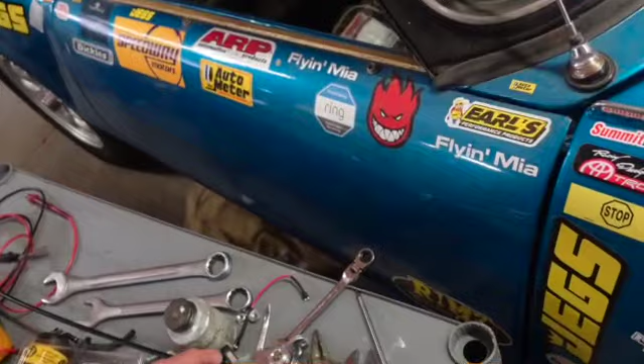Okay, well, let's start on this thing. I'm gonna have to make a piece of wood over there to mount this pedal, and we're gonna finish this up in a day or two, and we're gonna have a fun little test run, because we got this new fuel pump. I'm gonna kind of sort this out a little better, this fuel line action here, kind of get that done a little better.

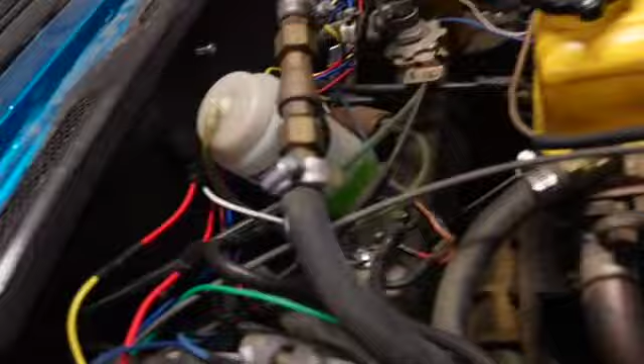We're also going to eliminate this system here. We're going to go from here to here. We're going to eliminate all this preheater stuff. I don't think that's doing me any good other than just getting in the way. So we're going to knock that out.

So I got a drain. There's my little drain pan right there. And we're going to drain some fluid out of it, coolant fluid, and we will delete that mess. I don't know, I thought it'd work.

Don't drive it when it's that cold anyway, and you're right next to the exhaust manifold. And I was thinking the other day, see these little brackets, that little bracket right there? I was pretty handy to have. How many of you know what those do, or did, or do if you got the parts? See, there's one over here too. Handy to tie stuff to sometime.

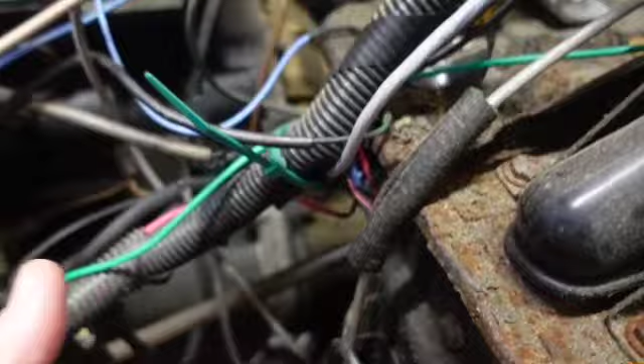That held those little cardboard shields that went here. These do pretty good, but they had these little cardboard pieces that went here and kept water from splashing up on the engine. So that's all. I don't see any point in those.

And the other thing I was thinking about the other day too was, when I got this car, it was like 99% original, if not 100%. And it had a radiator half that size, and it had the little blanking plates on the side. And this just keeps the air moving through the radiator.

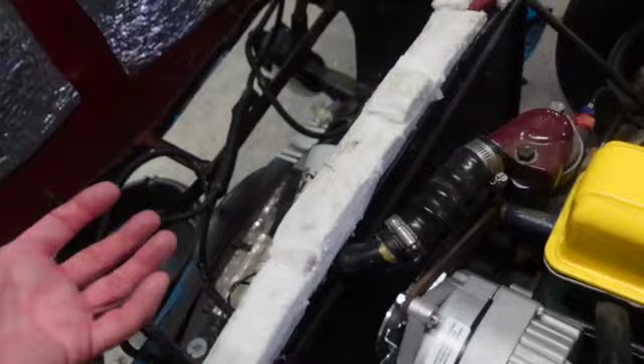And then I got a nice SPAL fan there, and it's just on a switch under in there somewhere. I don't know, I put it down there low. Isn't that cool? See that little red thing right there? I put it right down there low. But I'm gonna have to do some woodworking to get that pedal assembly in there to bring it up.

But we'll do that another day. I gotta start on the grass right now. It's almost 6, so I'm gonna go get the tractor out. I gotta switch that thing around, and yeah, I'll put both my Allen keys right here.

Cool. Okay, so this is the preliminaries. I'm not gonna take this out.

Let's turn the heat off. I'm kind of for that, it being 100 degrees, and that's why you turn the heat off. And I had a 76 MG midget, and you had to go under the bonnet and turn it out. Wasn't that nice? But if you didn't read the book, you didn't get heat. Right, Kathy? And you got to know to do that. You got to know the knobs to turn. You got to open the little ductwork things on MG midgets of that era. And if you didn't do that, you went around cold. And you'll end up having to put a grizzly bear around your face or something. Try to keep yourself warm.

Every time I want to get on the tractor, it starts raining. I don't care, we're going in. I'm going to get it started anyway. Make a couple of runs. I got about 45 minutes. Wasn't supposed to rain today. All right, well, get moving.

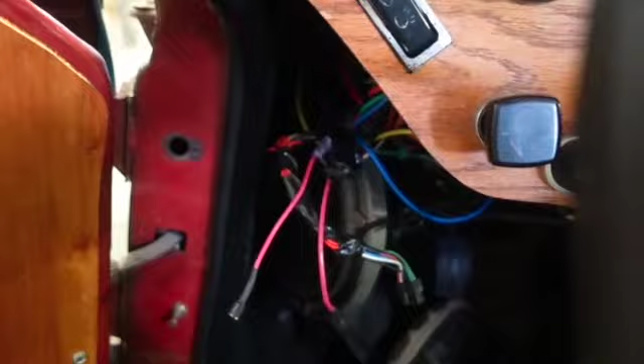All right, one of these is hot on ignition, so I got to figure out which one and kind of deadhead it and mark it, so I might want to use it for something else later. And the other one goes to this, so I've got to deadhead that stuff and get it up in there. But don't that look neater? And I might get a little black spray paint or something, spray that or do something, I don't know. But there it all is.

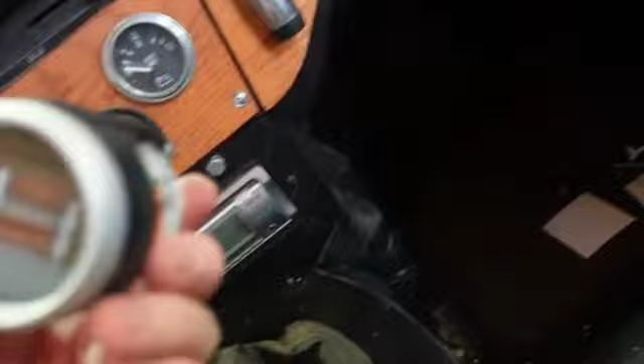Like I said, it just showed the three dashes and quit working. Makes you so mad, it's so expensive. And then there was my little thing that I made that I pulled off right there. So we're going to just kind of neaten it up in here. That was a useful thing, but once you get your carburetor set up, it's kind of just a little bit of a novelty, I suppose. I can understand keeping it going, but you can look at your spark plugs if you want to know what's going on.

Oh boy, that was some grass cutting fun there. Threw the belt last night, but I was able to fix it today, and my gosh, I think they could roll that up for round bales out there. Oh God, that was thick.

Well, I'm about to use a movie line that I never thought I was ever going to use. I didn't want to or think about it, but you'll see it in a minute. All right, come on. I usually use that little metaphor there to close out videos, but not this time. I spent some time out here today on, let's see if I can find my other light. Ooh, my bigger light. So, you won't believe what I'm about to say. I'm trying to build it up a little bit here. I gotta get a light to find the light. Okay, found the light. Stick with me here, this is going to be good. Don't go anywhere. Gotta get myself in some kind of apple pie order here. Let's use the big light that I don't like to use.

Okay, so here we are on Spitfire, like it describes, and you see there are three screws there. One, two, three, and that's the best I could do. This was hard by myself, because, well, just because I had to put a piece of wood behind a piece of metal by myself.

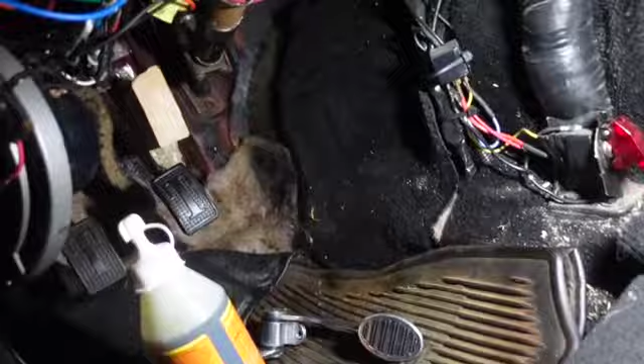So we'll show you what I did here. I had to put a 5.5 inch block of wood right here to be able to mount this pedal. I can't hear that noise. So I'm going to put it like this. It's going to be a little bit at an angle, and I got my cable figured out. So I had to glue.

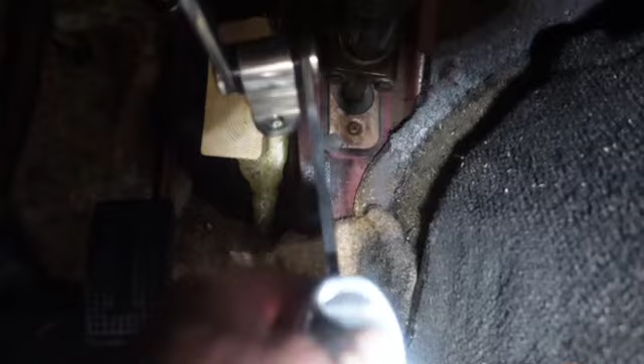Now you're using the accelerator pedal. Ready for the big line here? Okay, and this is Gorilla Glue, strong stuff. So, from the Blues Brothers, you know, when he's gluing up the accelerator pedal for Bob's Country Bunker boys or whatever it is, the good old boys.

And so there's where we're going to be. And tomorrow, see, I had to bring it way out there because the pivot for the original accelerator was so far up. So that's gonna be just perfect. And so what I did was I tried to line this up with the brake pedal, you know, kind of lose all that.

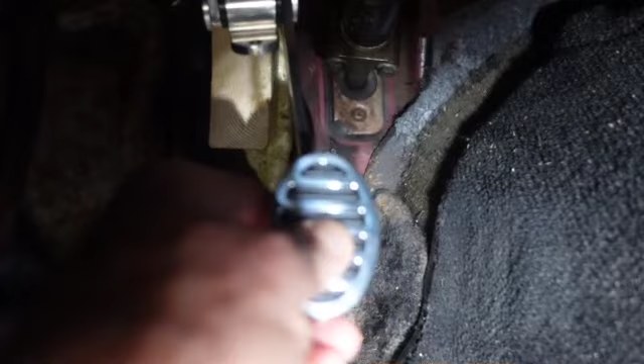A millisecond matters. I've always wondered about old British cars when they shipped into America. Americans were bigger and British people 100 years ago were smaller. That pedal arrangement on old British cars is mighty close. I always wonder if that killed my friend Jimmy. But it was more than that, it was other things, but that doesn't matter anymore.

So I think that's going to be fine. And now the trick here is going to be to put some Loctite in these. And I'll tell you the truth, one of these is already stripped out on where the hex key goes in it. It's cheap junk, but anyway, it'll be okay. So I'm going to put, I don't think it needs any lubricant, but I'm going to put some Loctite in there. But anyway, I thought that was pretty good.

Now, how many men other than Dan Aykroyd are ever going to be able to say that line when they're dealing with accelerator pedals?

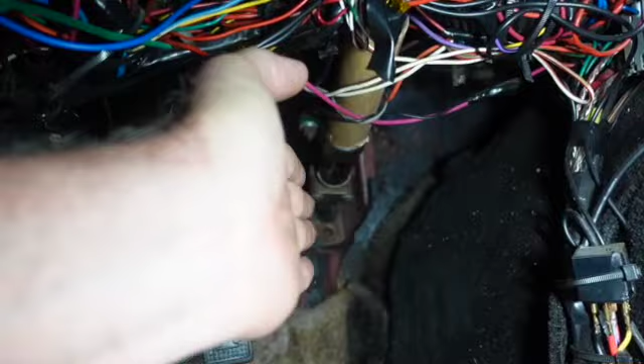Okay, I think we're in trouble here. So I'm going to have to do a little fancy cutting to get the carpet and everything around there. That's fine, that thing is in there ultra tight. And it's taking, you know, action this way, it's not taking it side to side. But I was surprised at 5.5 inches to bring it up to snuff. But that's, you know, everybody's going to, I don't know, unless you got one of these and you're doing this, you're not going to be doing that.

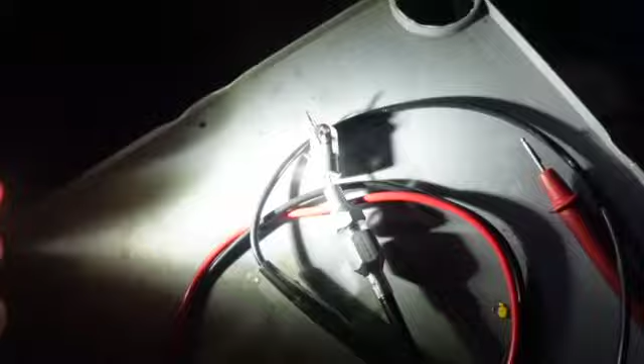But you probably might have to make a block of some kind. So this is the one that goes down to the pedal. I gotta kind of measure, make sure there's enough room for all of this mess. I think there is, and enough room for all of that.

Oh, this is the one that flutters if you don't turn it up all the way. Oh, okay. And oh, cricket. Sounds like my phone ringing.

So I think I got enough throw there, but I kind of want to get that bar up as far as possible so my foot won't interfere, because I got big feet. You know what they say when guys got big feet, right? Okay, so I've got to get this bar up as far as possible. There you go, get the light on it correctly. So I might move it up a notch or so. I don't know yet, that might be enough. But I don't want my foot hitting right here, you know? So we'll see how that goes.

So I gotta go in. Can you believe it? It's almost 8:20. All right, you can hear all the katydids out there.

All right, let's start to, it doesn't matter to you, but it'll be day after tomorrow before I can get to that. All right, I'm gonna try to keep this all in one piece, and I hope to do a test drive on this. I gotta get the Jag going, but we're gonna do a test drive on this so I can kind of give you an idea what it's like.

There are those three positions, and I'm going to use the middle one. Always start with the middle one, and then I got to shore up all of this gas line stuff.

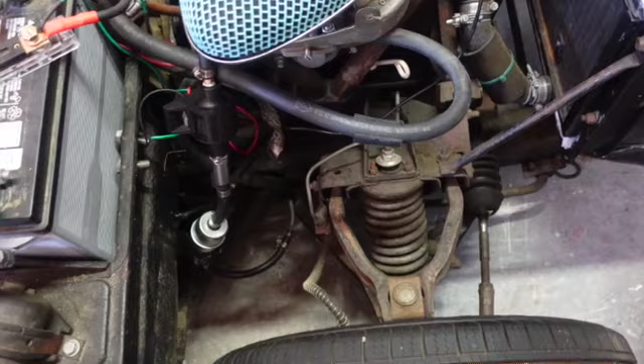All right, so let's mount up this pedal, and we're gonna put our cable in, and I'm gonna measure. Let's see, that's the part that goes to the carburetor. Okay, I hope I don't have to cut any of this off.

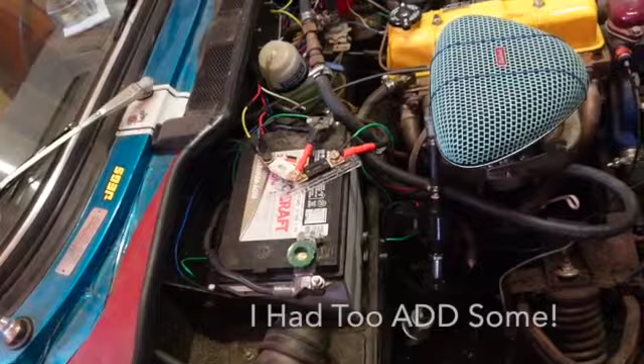I'm going to real quick shorten up, because I said I would, these hose things here. I don't know. Maybe I ought to do the cable. I'm going to put the gas, let's finish gas pedal, and then we'll do that. Just measure this hole and drill it.

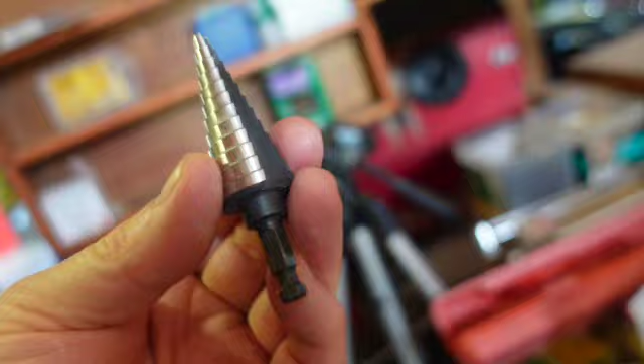So we want that to be as close to that as possible. 5/16. Oh, okay, cool. Well, let's see what we got here. It's an unmarked bit there. I think I'd rather go get a straight bit and do this. I think that'd be better.

Okay, here are my weapons of choice. I've got these two little screws that I don't really care for, but I'm going to use them. And I'm going to drill a pilot hole, and there's my bit that fits those. And there's my Bosch tool.

So let's go in here and mount this pedal up. Now the way I do it is I will kind of mark a hole, and I will mark one of the two holes, and then I'll screw it in and kind of get it firm, and then I screw the other hole. I try not to, I do one and I do the other one after the piece is mounted. Generally you just end up lining up a little better. Okay, so there's my first mark, and like I said earlier, I think it's going to be a little crooked, so that's okay.

I just don't want to split that piece of wood. So let me change bits, and we'll get her started. It's been so long, I almost forgot to put my Loctite in there. Let me go do that, because I just about did forget it.

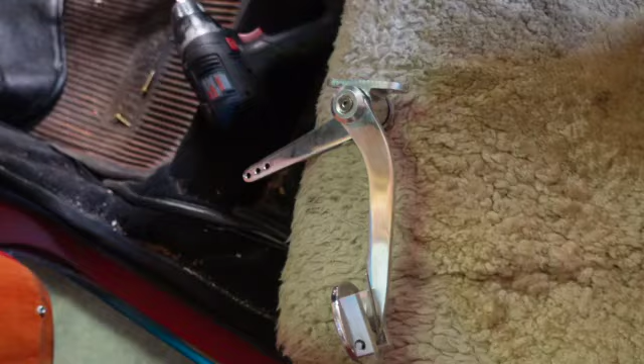I was raising the screw up to it and realized it. Let me double check and make sure that I want this where it is. So she's gonna go kind of like that.

I think I'm gonna take that up a notch. I'm gonna go get it and adjust this thing. I think I want that to be a little higher up, the arm or the pedal down, however you want to look at it.

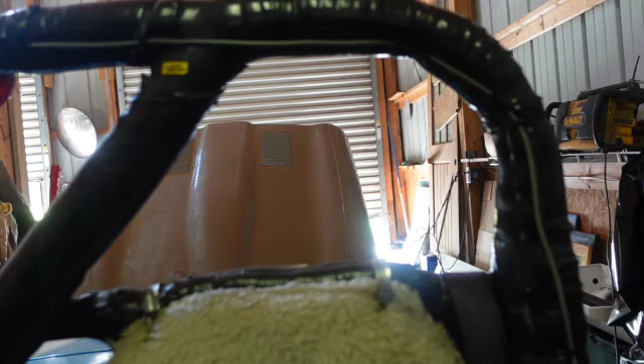You know, it's funny, I found, I need some hair stuff. Ooh, hang on everybody. I found that one of my wrenches fits better than these wrenches that came with them.

That's the way it goes sometimes. I think the tool stripped out more than the screw, because I don't know why they would do that. Why would you do that?

Okay, just to kind of prove the theory here, just put a little drop in there, a little dab will do ya. And put the cap back on that.

I did end up adjusting the arm up a little bit more. And so there we go. Just to make sure we all feel happy here. Okay.

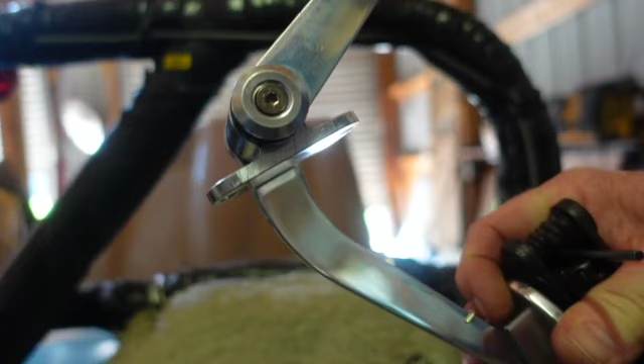Okay, and that's all you need to do. You can tell I brought it up a couple of notches. So, alright, that's cool. Just put all your tools where you can get to them, I guess. We'll be drilling the hole for the cable here in just a minute.

Okay, I decided to go with this instead of a drill. And you can see there, it's a little crooked, but you know, who'd notice? And so I think that's going to be fine once I get the cable adjusted.

And you know, there's no laws or rules. I mean, whatever works and keeps your gas pedal away from your brake pedal there. I think that's good right there. So let's mount up our drill here.

You might as well just stick with me. It'll take a second. So see what I mean? All I got to do is drill that pilot hole.

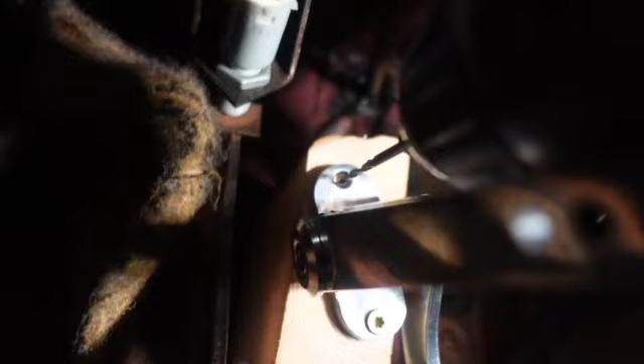Keep clearing your flutes, you know. All right. And then you just, I had a feeling.

That's not a magnetic bit thing holding that in there. I'm screwing up all my focusing, but okay.

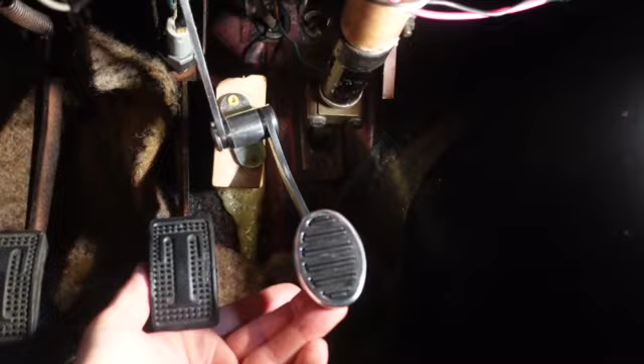And I think that's just all in the world you need. And then you got your pedal. All right. And then I'm not worried about that being a little eccentric up there because that cable's pretty loose.

All right, let's get our tools out of here and sort of figure where, ouch, where we're gonna go. Okay. So there.

Okay, so there's that screw right there. Let's work off of that. All right.

That spring's on there kind of weird, but that's okay, it's working. Looks like it's hooked in more than enough. I don't think that's going to interfere with my brake light switch. So let's go up and see.

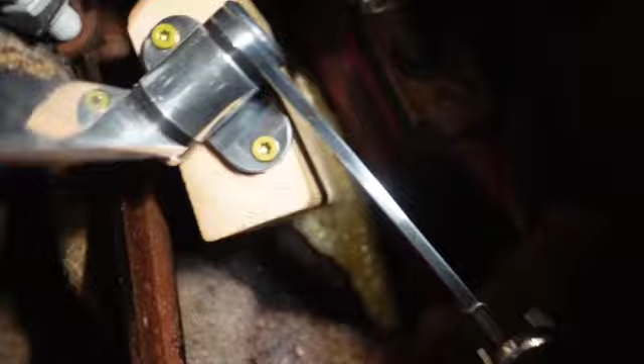Okay, there's the hole for the wires. There's that screw there. I can't see putting it anywhere else. Okay, so there's that screw there that was underneath.

I'm just gonna go in right here and see what I can do, okay? Woo, boy, it's hot. Okay, I've got to use my other hand to hold those wires back. Last thing you want to do at this point is nick up a wire.

Those are the greatest bits ever. Came from James and Barbara in, where were they? Burlington, yeah. And that's the one that gave me that old truck I painted turquoise. But he worked in a machine shop and gave me these bits.

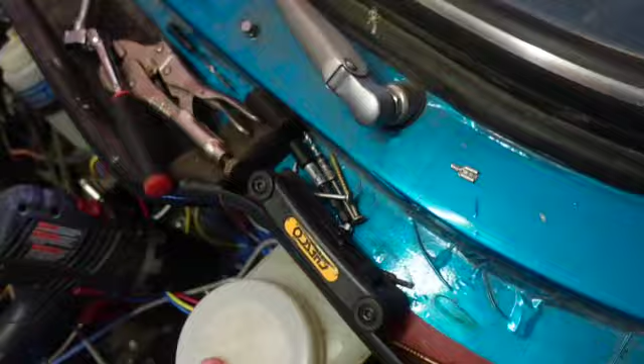I've broken most of them because they're so brittle, but there was some kind of drill bit. Right now, all right, we just popped through, and that's a step bit. So let's see where we are here.

All right, let's see where we are. We're way over there. All right, well that's okay. See the tip of the drill right there? I'm gonna go with that. I ain't got no other way to go. I keep all my stuff in one place. Let's see if I can get this through there and get enough on there to give us a running start.

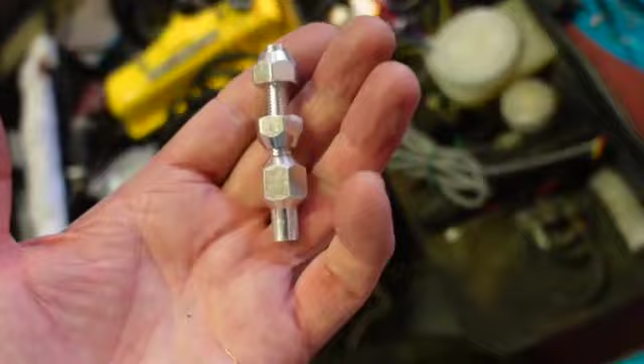Okay, let me go get the measurements on these. All right, I got her in the vise, and let's see what I can do here. Got the vise and the vise grips. You know, good things are going to happen then, don't you? Oh, well that turns like butter. Maybe it's supposed to, I don't know. Well, that was nothing, I didn't think it would be much. So there you go, so she's got a little twist to her now.

Well, that was hardly even worth taping. Dadgummit. Okay, so that's better. It ain't perfect, but it's better. I'll show you what I got here. I'm tightening up the cable hold. I think it's 14 millimeter or 9/16 or something.

And you don't have to go crazy here. Okay, I don't know if I'm going to do a test drive today. I might crank her up, but I'm not going to be able to take the Jaguar out. I just ran out of time. I tried to accommodate a bunch of time for this. Take the battery charger off the Jaguar, so I won't forget about it.

Now I don't think I told you, but I went over and soldered that end and cut it. So you can use super glue, but don't breathe burned super glue fumes, whatever you do. All right, I'm trying to. I know this is shaky, but this is like under the car stuff. So let's get that.

Come on. All right. Just feed it on up in there as far as we can. And I gotta tell you, I'm actually laying on the end of it. All right, come on, keep going. All right, come on, come on.

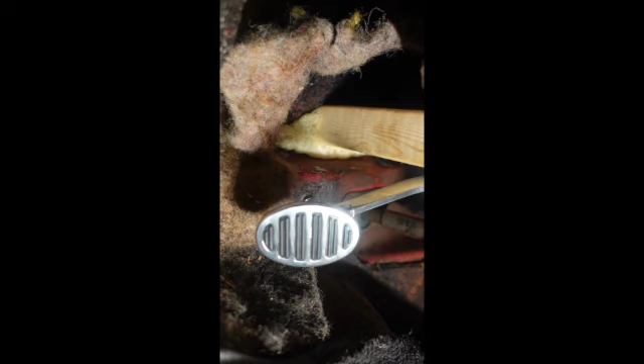It's a long cable, it's like it's 3 feet long or something. Okay, and it's stuck to the magnet on the flashlight. You know, everything's gonna go wrong when it can. So I'll tell you the truth. All right, we've got it all up in there, and we're down to this.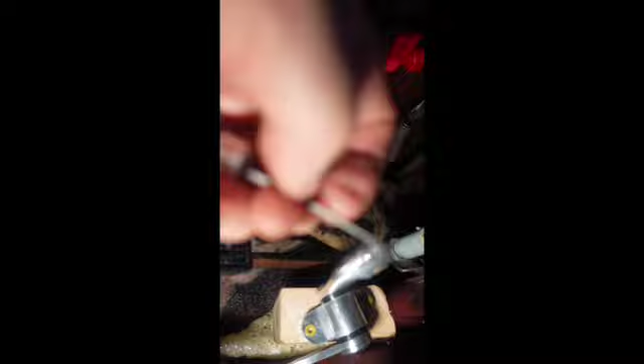So let's go ahead and put this on. I think I'm gonna put it on. I'm gonna have to lock this too somehow. All right, we'll worry about that in a minute. I don't think I can squeeze them with my fingers. It's got the old end on it there.

Nope, can't. All right, well, we're gonna attach this, and I'm gonna attach it to the, I think the, I kind of want to be as close to that thing as possible, so I'm gonna go to the back one. All right, it'll be all right. This ain't no turbocharged powerhouse anyway, so a little bit extra throttle ain't gonna hurt nobody. Okay, I'm not gonna pull that.

Let's just take a look at that. I'm not gonna pull that. I think that'll be fine. Okay, so I gotta find a way to block this up or do something with it. I think I got an idea. Okay, so my idea was to get a little bungee cord, and that'll do that. Okay, leave that tool right there to remind me to pull the pin. There's what she looks like.

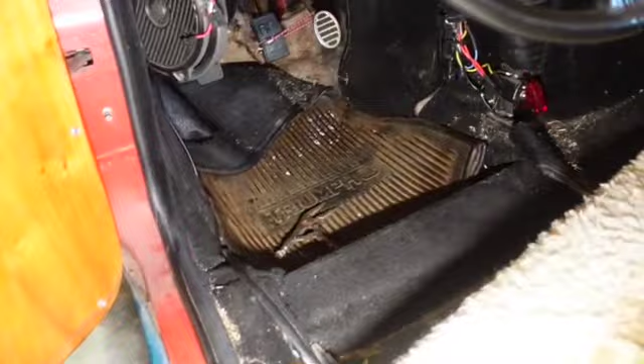All right, and should I wait till tomorrow and go for a ride? I don't think I'm gonna. Got hair all in my mouth. All right, so let's pull on this. Keep the salt off your hands there. Okay, don't let that touch across the battery. Okay.

And you got to figure out your route here. I think through there is okay. That doesn't bother me. All right, so let me slip the cables on and get over there and see what we got adjustment-wise. Okay, and we got to slip our outer cable on. Might as well just hang on. Alright, I soldered in. Okay, I lost one little strand, one little pitty there.

So you don't pull it back through again. Okay.

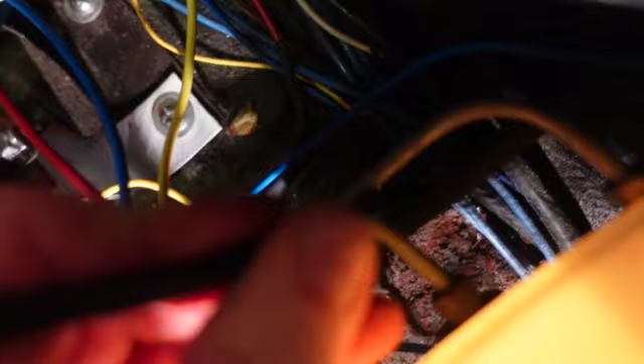So there's my outer cable. What you want to do here is make sure that it seats all the way down, right there, that black cable going into that little silver thing. You want to make sure it's not lipped or anything. That's okay with me, I don't think that's going to cause any problem.

Boy, it did need to be 3 feet long though, didn't it?

Okay, so I think that pillow's about had it. What do you reckon? Oh, if that pillow could talk, it would tell you about Doris Day and Rock Hudson, pillow talk.

Okay, so here we are now, and you want to keep pressure on that, and you know what? That still ain't long enough.

Even if I pulled it through the other way, I would have never dreamed that. Well, looks like you fouled up, huh? Well, I know what I'm going to do.

I've got plenty of cable to get there. I just need more outer cable. Well, we can... I think we can... I've got outer cable.

Dadgummit, if anything can go wrong, it will. There ain't a way in the world that thing's going to reach. I'm still a foot away. And the one in Daphne's a foot shorter.

Well, let's put all our cable stuff up here. They got that dimpled in there. Got dimples, you got dimples on your jaws.

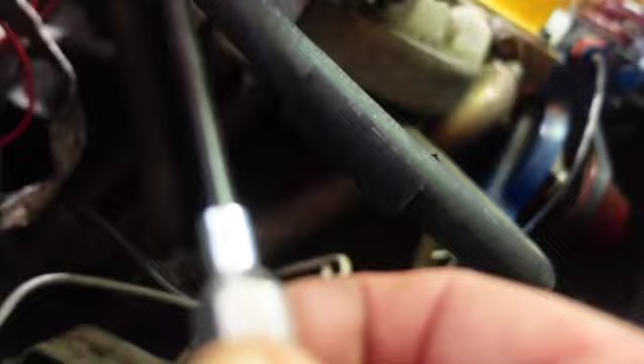Well, let's get a little drill bit and see if I can get this to release.

Ladies and gentlemen, I'm just having a blast. Don't make any mistake of thinking I'm not. This is just too much fun. I'm having a lot of fun.

Let's drill out them little dimples and we'll be fine. Okay, well I drilled through the dimples, and so now I got that off. I ain't worried about doing anything about that.

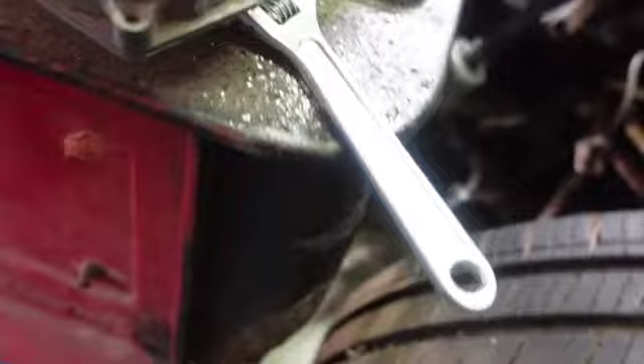Okay, so let me see. I don't want anything on the floor. Let me see how much I need here. I've got a tape measure somewhere. I do. Alright, I'm not scared of any of this. I got shrink tube and stuff so I can make this look good.

So it's down in the hole there, and this is how much more outer cable I need. See, I got tons and tons of the inner cable, so God bless them for that. So let's see how much I need here.

I need, let's call it, let me double check that. You know, it's a little bit forgiving, of course. Let's say about 9 inches ought to do it.

So where's a man going to find 9 inches of outer cable? Well, I'll tell you where we're going to find it. I'm looking at it now.

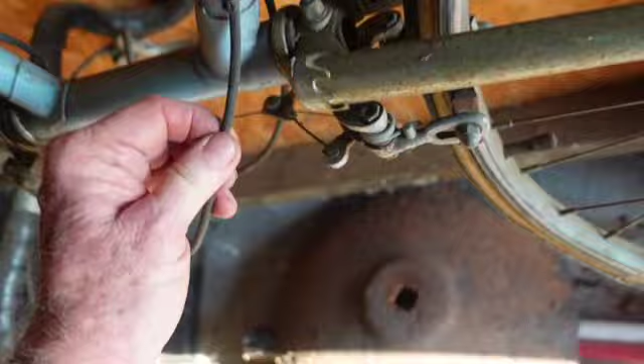We're going to use my old bike cable stuff here, because there's about... those are a little different. Ooh, look at the big katydid. Look at the big bug there.

Yeah, we're gonna use this cable here, and that'll be fine. But telling you the truth, I'm just flat out of time again, and I'm not gonna even bother trying to save this. I'm just gonna cut it off because it looks like it's got a kink and could be replaced anyway. So we're just gonna cut it right off

with these bad boys here. Okay, so see that cable there? Alright, that was kind of bittersweet. Of course, it's gonna be kind of nice thinking that this was off my old bike.

Alright, it's in my back pocket here. Oh, the other tape measure. Well, I got plenty of them.

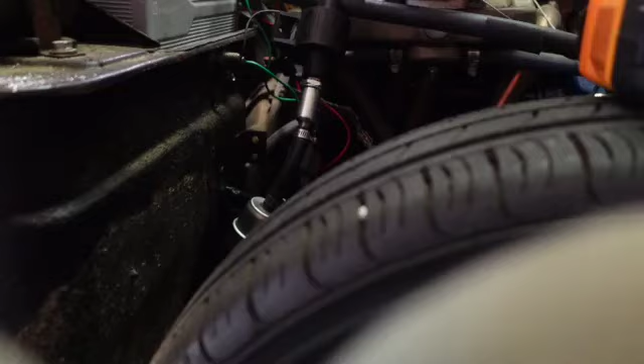So let's get the old inner cable out. I got an idea, let's get the old inner cable out. I'm gonna put an orange thing there. I'll get it later. So there we go.

Alright, so don't let that stand, don't let that fall on the ground, that piece of inner cable, because that's a trip hazard.

So I need 9 inches of this. I keep it there. Okay, so there's my 9 inches of inner cable. Okay, and you don't have to do anything to the other end.

This inner cable went to market.

Hear that alarm? That means I gotta go. Okay.

Alright, let's just take a quick look at this and see. There you go. Before I make all this stuff permanent, I'll put a little stay rod right there and all that stuff. Okay, more later.

Thank you. Alright, I'm coming. Had a lovely little thunderstorm pass, cooled it off like 15 degrees.

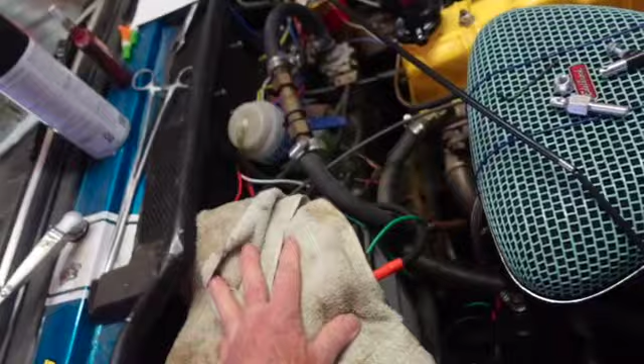Be careful about this battery here. I need to throw a cloth over that just to make sure we don't arc out. Let's put it over the positive side just to make double dog sure we don't arc out across that.

More Gorilla Glue and some zip kicker, and I'm going to zip kick this thing down in that thing, this end down in here, because I don't want that popping up and messing me up later. So let's put a little bit of that on there. I don't know how much I got. I got plenty.

Okay, I've got about 4 pieces of shrink tube on this, and I cut off a little bit of that inner cable that I had, and it's got glue in it, and that ought to take a little tension off the buckle there.

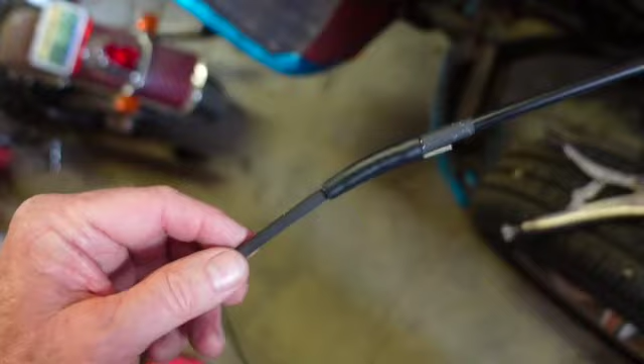I still don't feel happy with this. See how it's bending? Maybe it'll be better when it cools. But I got the super glue down in there and the zip kick, so it won't pull out of there. I think that's going to be okay.

All right, so let's put it there and hook it up to the carburetor. Make sure our gas pedal is up, and it is. Okay, world's greatest wrench right there. No doubt about it. Okay, it's a good song too.

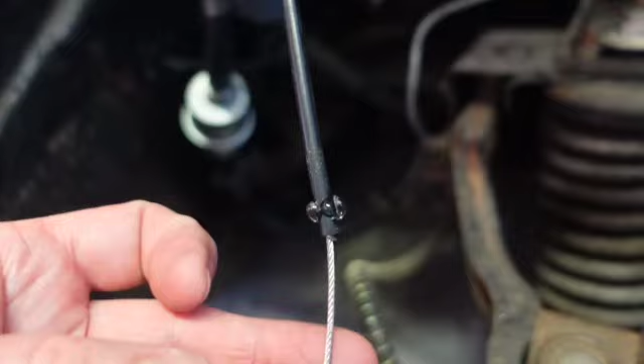Alright, let's get all that stuff pulled apart. I think that's going to be okay on that bend. So you see I got this Gorilla Glue gel going here.

You don't want to get this on your cable at this late date. So there's the gel, here's the end piece, and we're going to let that sort of set.

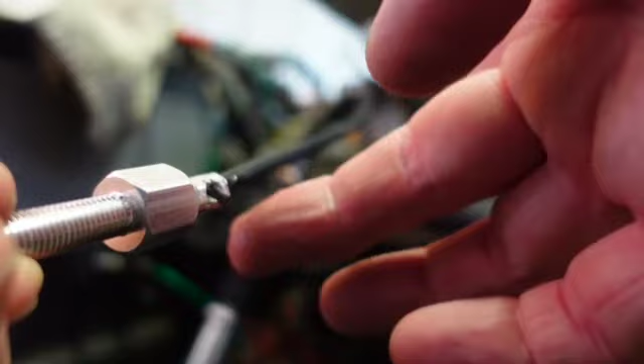Now I don't recommend you do this, but I'm going to do it. I'm going to touch the super glue where I had to drill those dimples out. And how many of you knew that song, Got Dimples on Your Jaws? And then give it a little zip kick.

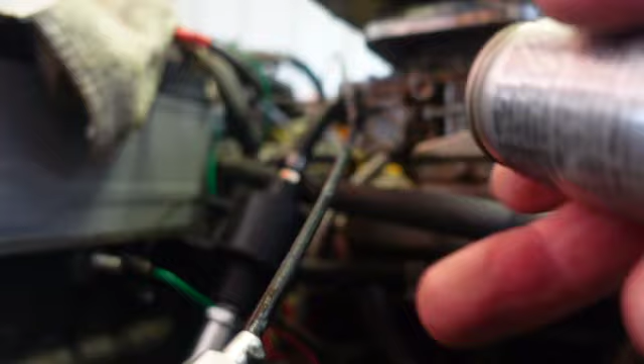Oh, finger stuck to the zip kicker. Now if you get super glue on your skin and you hit it with this stuff, it is going to chemically burn you very hard, very badly. So don't let that happen to you. So now I got no fingerprints on my middle finger there. And just because it's zip kicker don't mean it don't got to stay there a minute.

Okay, well let's go for the gusto here and see what happens. Ooh, stinky.

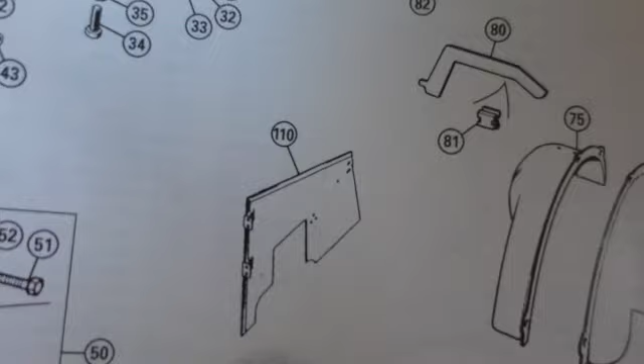I wanted to mention this. I mentioned earlier in my video about those little brackets that hold the little valence panels. There they are right there. If you want to replace those, you're talking about close to $400. I believe you can make that for $1.25 out of hardboard and paint it or something.

Really? So I don't think we're going to be worried about that at all. So like I say, if I'm driving in the rain, I'm going to be the one getting wet. So if you want those, I would probably suggest that you just make those yourselves. And if you read this in the Moss catalog, it says probably won't fit anyway and be all scratched up. So you can do all that at home. You can mess things up and scratch things up at your own house.

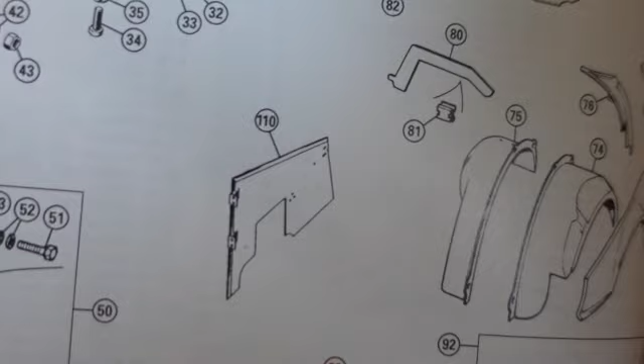Okay, so we've got that in our little catch right here on our synchronized Weber. This is not a progressive, so we're going to make sure that's just on there tight. Okay, and it is. Now we're ready for this end, which will mean I got to sort that out, and then we're gonna be testing this thing here pretty soon.

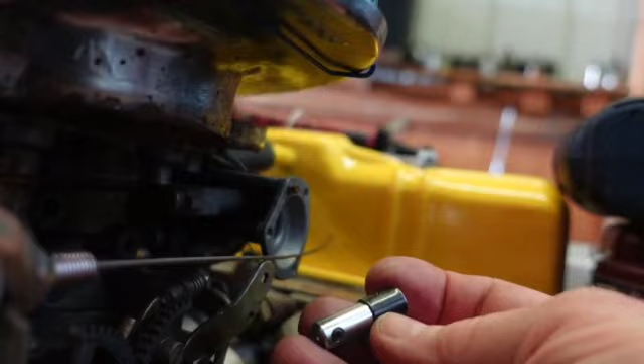So got to get the Dremel over here and cut this about as accurately as possible. What did I do with them springs? Let's see where it mounts up. Let's see what it all does, because I really hadn't thought about it.

I think the spring should go down here and give you a little bit more leverage. Okay, we're going to do that. Not going to worry too much about spring stuff right now. I want to just get this video done because it's been real long, and I got a lot of bonus footage for you.

I noticed that this end only had one set screw in it, but I have a set screw kit here, and one of them worked. Let's not drop that. Okay, I think I'd rather have it tight on both ends. Wouldn't you? Well, it's kind of messy down here sometimes.

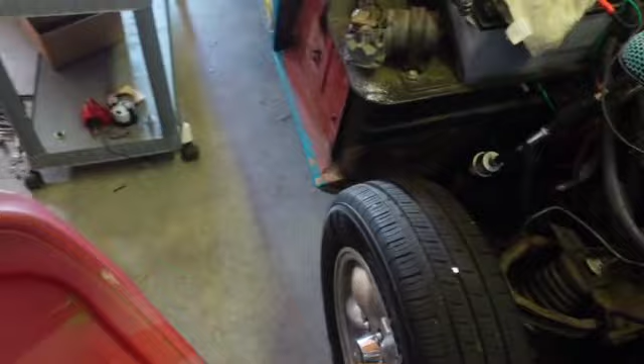Well let's get this cut and get the Dremel over here and see where we're going to go. Now it doesn't go in real far. Alright, we're going to be testing this thing in just a minute.

I've kind of decided I'm going to just let this spring right here do its chores. Seems like it's okay.

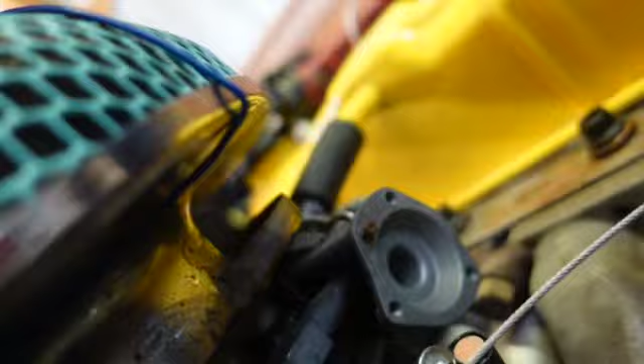Okay, so now comes a somewhat important part. How far up inside of this piece does it go? Well, I measured it with a paper clip. It goes that far up. So I made a little blue mark on it. This is a delicate little bit right here, because you want to get this as right as you possibly can. It'll be fine.

I don't know if I need additional spring. I guess I'll figure it out on the road, won't I? Lord, what did I do to deserve that? Okay, so there we go. Got a little blue mark there.

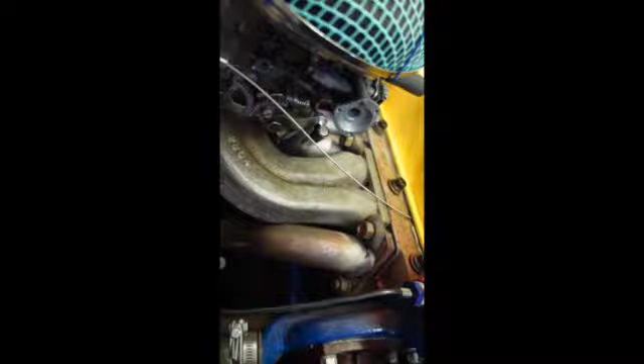So let's get the Dremel over here and cut that, and we'll set this in. Here we go, I got to use both hands, and you can't mess this up. So I'm going to keep a little tension on. I don't know, maybe you can see how it is now.

Alright, let's move this drill with a very delicate bit on it. Let's turn it up a little more. Did it.

Okay, let's get this back over here and unplugged and see if we can get that cable up in there. I got my blue mark on here to make sure I get it deep enough. So let's see if I do.

I don't know what to tell you here, so let's see if I can angle you guys. This has been impossible to film real well because it's action-packed, you know. And if it's action-packed, it's going to have a little bit of weeble-wobble in the production.

Okay, I don't care if I even lose a strand. It's okay, I'm going to try not to. No, okay, I lost one.

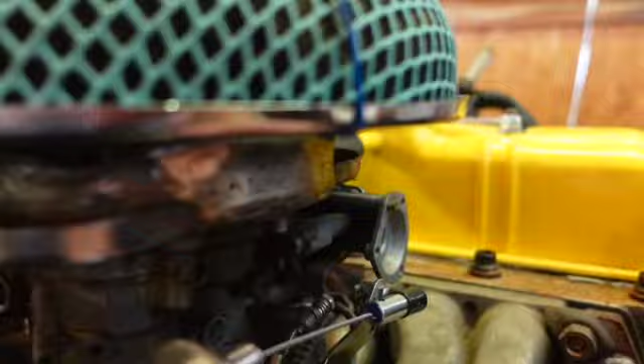Okay, alright, that feels good right there. So let's take a look at, you didn't get to see much, did you? Okay, we're going to see I lost one little strand. That's not going to bother me.

I'm not going to cut that off because of the embarrassment. No, just don't tell anybody, okay?

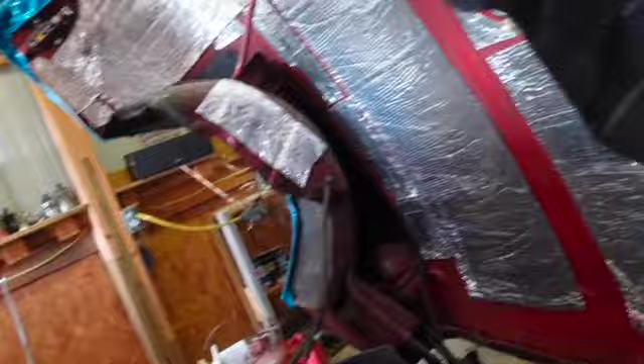But let's go take that little, boy, that really is blisteringly sunshiny out there. Okay, let's just see what it feels like.

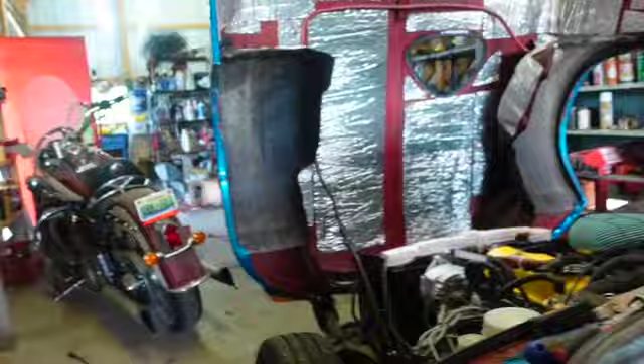Yeah, I'm going to need some kind of spring for sure. Yeah, I think that's going to be obvious. Because now there's no gas in the carburetor. I haven't turned it on in days, so I'm sure the float, well, probably a week. I'm sure the float bowl is pretty.

Let's see where we are here. Yeah, it's gonna definitely need more spring action. The drag don't feel too bad, but okay, let's see, springs. Spring is sprung, okay.

Alright, I'm not gonna go into too much detail on that. I just put a spring on it. Here, clicking back right there. I think that's as good as it gets right there.

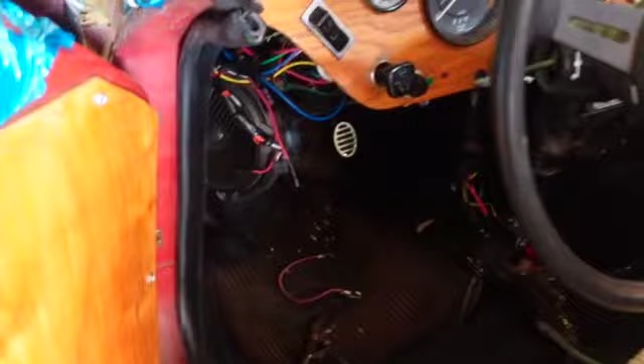So let's go try it now. Put the tools out of the way. Hopefully I won't be needing to get on your knees and pray, pillow anymore. Okay, I got to pull that, split that pin. Let's see what it feels like.

Okay, let's see if it returns all the way. Well, I do need that pillow one more time to set that pin. All right.

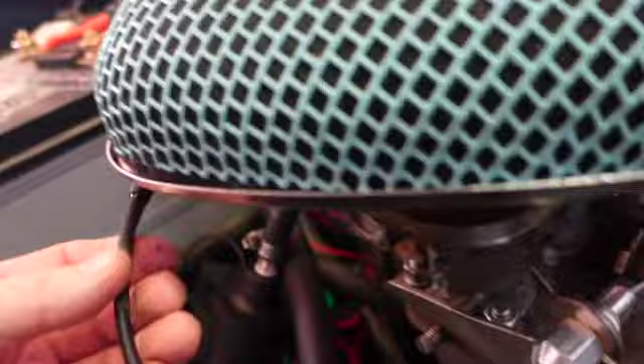It doesn't feel great, but it feels pretty good. I think it'll just need to wear in a little bit. I didn't put any lubrication in the lines either, so we're going to do that, and then we're going to clean up a little bit. And I'm going to change these lines right now. I can't stand it anymore. I don't have enough time to do that, but I'm going to do it anyway.

Alright, so we just ran directly to the head. We lost all that nastiness there. There it is, don't need that. Not much leaked out, so I'm good.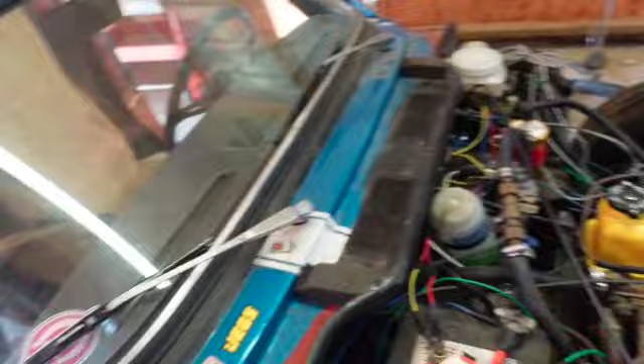So let's see, I was going to talk about some stuff. This anti-roll bar, that really helps with stability. Like I say, I think I got that off Victoria British, I'm sure. And down under here is where I made my little sandwich I talked about that holds the radius arm. So it's this panel right here, and that's pretty cool.

Let's look now, the roll bar. Oh yeah, the stereo, I got a big old stereo in it with subwoofer and the big Kenwood thing here. I think I've got enough light here to look at my stainless steel exhaust, which has been great.

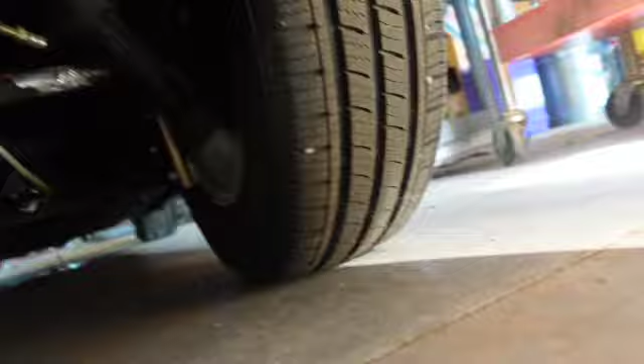I fit perfectly, and you can see the roll bar hooked right there. See how it goes under, and I put that blue pipe on it. That really helps a lot.

Okay, anti-roll bar and roll bar, positive roll bar. Let's see, the sandwich thing.

Oh yeah, the dash. Yeah, I made the dash myself. Isn't that pretty? I'm real proud of that. And that's so I could get extra gauges in it. It only had 2 gauges and a little single lamp up here.

I know I moved them around, but that's a high beam, and that's an oil pressure like the green one right here, and that's a charging light.

And I was able to put my light switch in and turn signals on both sides. But the hardest part was doing the controls here. And y'all don't know it, but you pull out on this thing to get the blower motor to go. It's got a 2-speed motor, and most people don't know that. Some people I knew that had these didn't think it had a blower motor, and I reach over and turn it on. So that's something to do there.

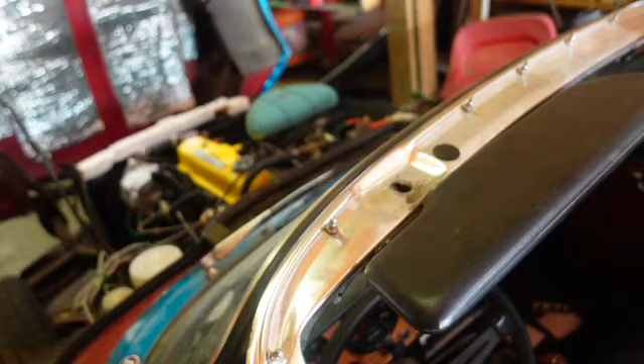So hi to Chris Fisher. Yeah, that's right, I think I said that earlier.

Now the other thing that I did here was an oil bypass, and I put the oil filter up there because this is at an angle like MGs and other cars, and even if you got a good anti-drain back valve in your filter, it's going to drain back. So the way I have this wired is I can turn it on, hit the starter and not pump gas in it, so I can get oil pressure before I crank it, which is always good.

What else have I done? I think that's about it. These are TR6 sun visors. I think I had a kit on that. So I think I'm done.

And I'm big on them fuses. I put this stuff here to force the air to go through the radiator.

Oh man, that's bright. And how's this charger doing? It's not doing too good. Okay, it's gonna have to.

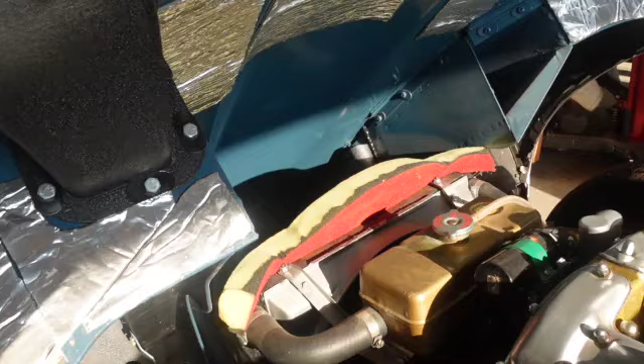But see, they got a piece of foam up there on top of the radiator to force the air through the radiator. The original fans on these were ridiculously bad, and I don't even have a mechanical fan on this one. It just doesn't need it.

So let's see here, I tried to make notes here. I did that already. Oh yeah, I gotta go get some fake rocks. You know how that is, gotta have some fake rocks lying around.

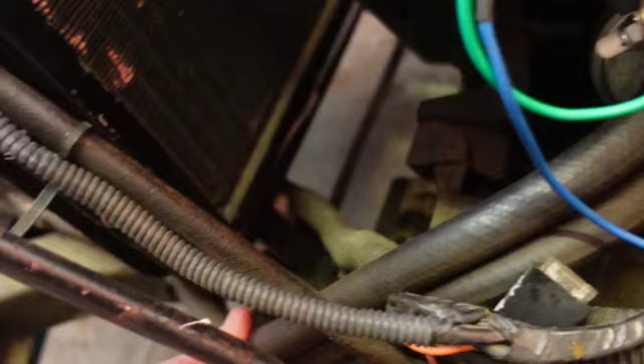Okay, so yeah, I'm a big believer in this thing, and this oil bypass, and I just love it. So let me get the Jaguar moved, and then it'll be an hour before I go on a test drive, but I could probably just move the Jaguar.

Alright, let me go upstairs and play around with the fake rock stuff. It's old siding, actually. I'm going to use it around the pond.

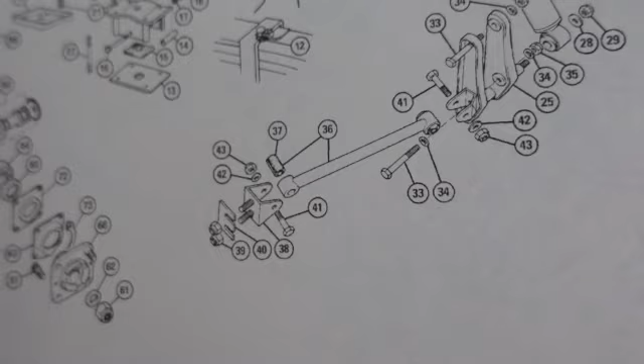Change those bushings, and take that spring out, change those bushings up there, check your shocks back there, check everything, change the oil in the differential and all that stuff. But this bracket number 38 bolts right behind your rear end on both the passenger and driver's side. And that piece of metal back there is mighty flimsy.

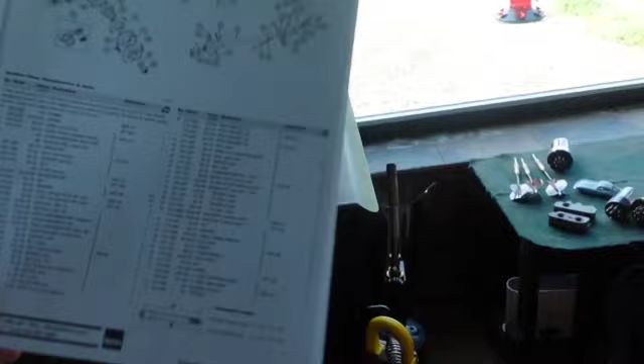So I would recommend that you bolster that up. I'll tell you exactly what I did. I got an old road sign and cut it to that rectangle shape. I made 4 pieces, inner and outer, slathered them with fiberglass resin and fiberglass, and made a great big sandwich right where that bracket bolts. I got some longer bolts and put it all back together, and it was really nice. One of the proudest days of my life, and sometimes you get lucky.

So I did just like Rusty Wrench did, and rebuilt all the front suspension, all new shocks. I put a racing steering rack in it. I found that easier than rebuilding the original rack. The boots on those stank - I had to change those boots within a year. So I redid all the suspension, all 4 corners, everything I could do.

I drove to a place way far away from me, in Concord, North Carolina. Concord, Kannapolis, whatever a Kanapa is - I know what a polis is because I took Latin. But I found a guy that would actually do a 4-wheel alignment on a 1970 Mark III Spitfire. It's kind of in a little hole behind the building, and he put the 4 corner things on it, and it was perfect - didn't need any adjustment at all. I was real surprised by that, especially after all the work I did on it.

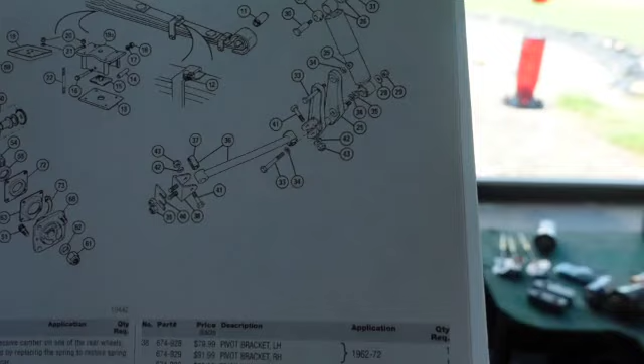But you got to remember, if you make that sandwich, you're probably going to throw that off a little bit. I might recommend that you don't put one in the back, just put one in. But you got to do something to bolster this - you don't even have to cover the whole panel, but I'd recommend you do something to help with this area right here where it bolts to that flimsy body panel at the back of the seat. Now, I would not have known that if I had not pulled the body off of it. I probably would have though, because I've seen it before. I had a Mark I, one of the first couple hundred Spitfires ever made, but it was a rusty project - didn't have much left, too much of a disaster to continue. But I remember on that car, the driver's side radius arm was just barely hanging there. So it can be kind of a flimsy point, so take care of that.

A couple other little notes - this car is wrapped, it's not painted, and that's why it's got the cool color. I mentioned all this before, but you know, repetitiveness. See my overdrive badge? That's because there's a Mustang T5 transmission in this, so I love my little 5-speed gearbox.

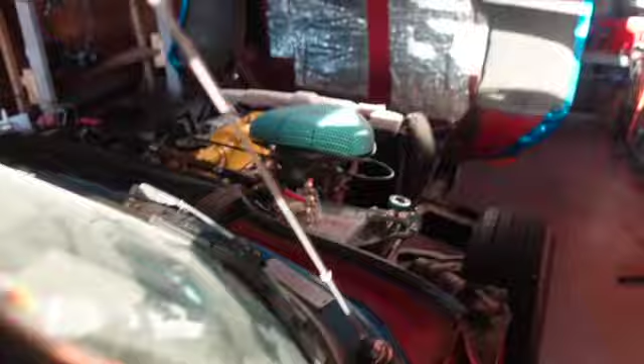So let's drop the battery on. Let's make sure nothing burst out in flames. Won't hear the radio come on because I don't have it plugged in yet. Okay, I think I can lower it from that side now. Now Alan, he's got them fancy compression things - I ain't got any of that stuff, can't afford stuff like that. Alright, let's see if it goes down without fighting, because I had that SU pump on there that failed. I'm tired of fighting with SU pumps - never used to. Let's see if it hits anything. It hits that cable a little bit, but not bad. Okay, let's lock her down.

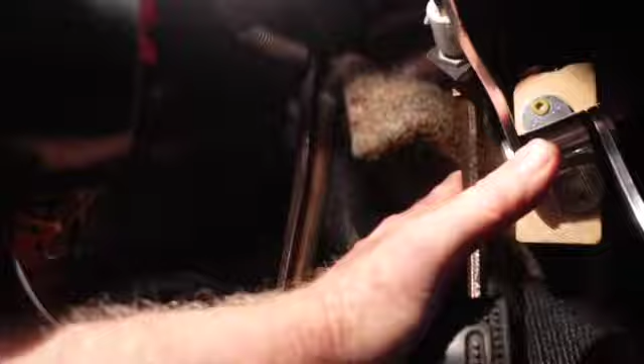We're going to take a short little ride, and then we're going to cut to bonus footage. Now you might notice too, see the light comes on, but it only comes on the side that you open - oh, I didn't pull the pin on that thing. Let me go do that real quick. Okay, split pin engaged there. Camera's been in the house, it'll look a little foggy. I don't think that's going to affect anything, so we're not going to worry about that carpet - I got to cut it to fit around there.

Let's do the test ride, dadgummit. I'm tired of waiting, tired of the whole thing. So my Holley EFI works some of the time. Speedometer's on if you do the T5 gearbox. Oh dadgummit, oh so many social engagements. So I got a cigar lighter even. There's my Austin Healey switch - it's got the double-sided things. I got other things here that save me.

Gotta put that in right side up. Alright, we'll turn that on in a minute. But see, what I can do is make sure she's out of gear. Yeah, that ain't gonna hurt nothing. Alright, now I can hit my starter and get my oil pressure up.

Okay, there we go. Now see, when you open this side, this light comes on.

Cool, huh? Wish you'd thought of that. It's just, I must have been really bored that day.

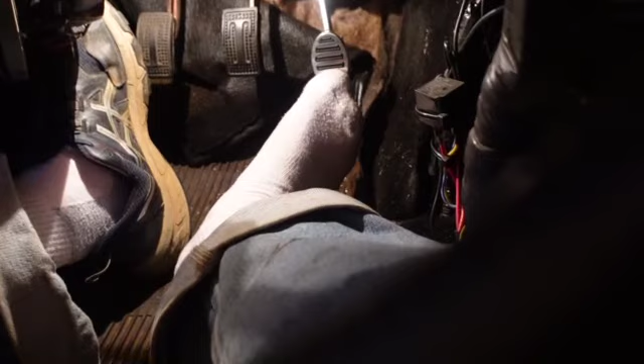Probably need to just give that a little bit more give.

But I like it, so I've got to fix the carpet too. I've got a knife in my pocket to do that, I got carpet knives over there in the toolbox, and I pull that down to find the other end of the original stuff.

Let me get my shoe on and get my glasses put away.

And so that will take a little cable. I tell you, I'm for that. I'm not gonna do it in the Healey or anything like that. No way.

Probably be a lot easier to do. But the Healey uses that little system on top of the intake manifold or the head or something. So instead of all this other mess down here.

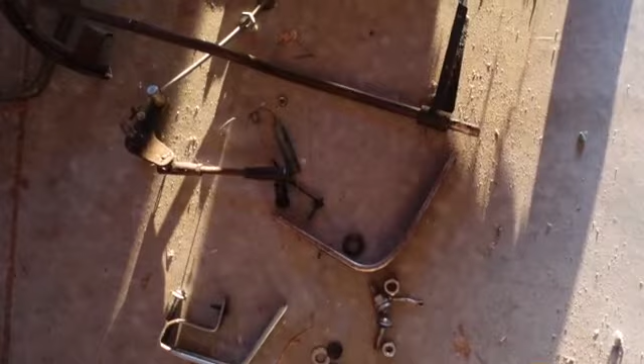Oops, that's where that went. Oop, there it goes again, back up there. Instead of all this other mess, we now just have a cable, so I'm okay with that.